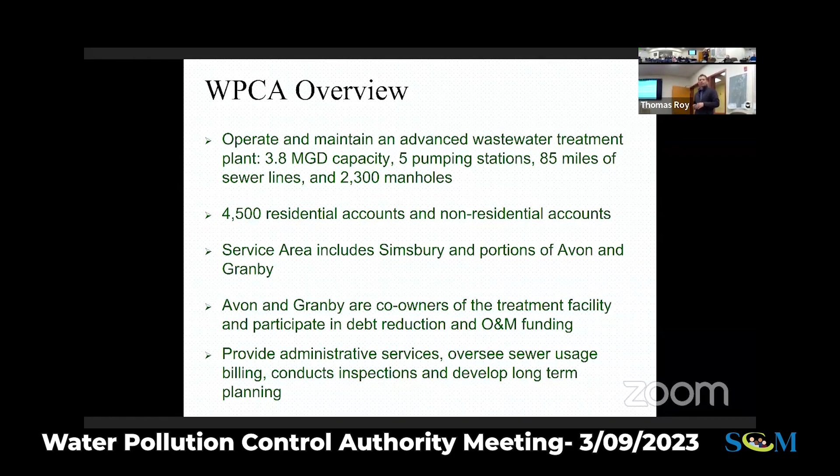Once we start this project, we have to finish this project. You can't be half sewered or half not sewered. So the intent would be to go in, we're going to put down new pipes, we're going to get rid of the old pipes. In some cases, the old pipes might be abandoned in place.

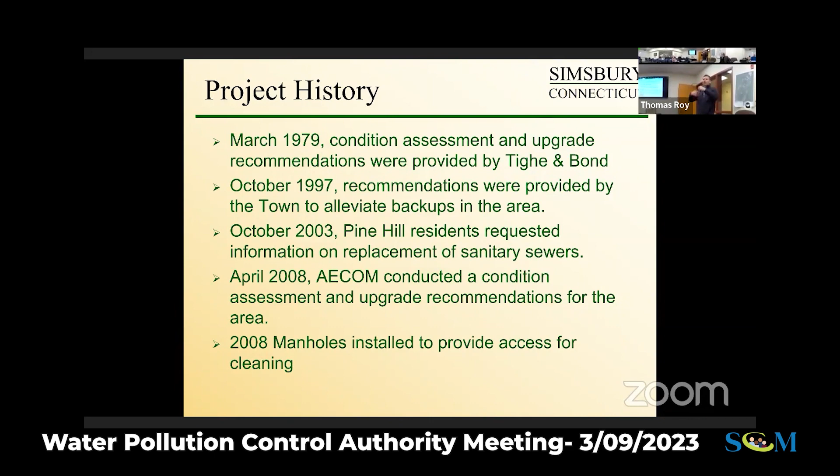We are going to go as near as is reasonably possible to each of your homes in terms of replacing the lateral. If we're in the main line and looking up and we see that you have stone walls and gardens and ornamental plantings, it's going to be very difficult for us to work through or put back in place. We're going to make a judgment as to what is the condition of that lateral. We'll be in a hole looking at the lateral right there, being able to tell, is this a good quality sound pipe? Is it filled with roots? What is the anticipated life expectancy of that pipe? If it's bad, we're going to push forward until we get to a point where it's good quality pipe to make a connection. If it is good, if it was PVC, we're not going to tear up any farther than is reasonably necessary.

All of the roads are going to get paved. We're not doing driveways, we're not doing common areas. It's a little bit of a stretch in terms of what the core mission of the WPCA is, but we're also being very practical and reasonable, trying to find a way to accommodate all of you.

Hey, how are you? Fine, thanks. Excuse me, did I miss anything in our presentation?

No, that was the earlier stuff, just about how we run our stuff, how we run everything. And you know, we work with Granby and Avon as well. Okay, and I think we had just a quick schematic of where we're planning.

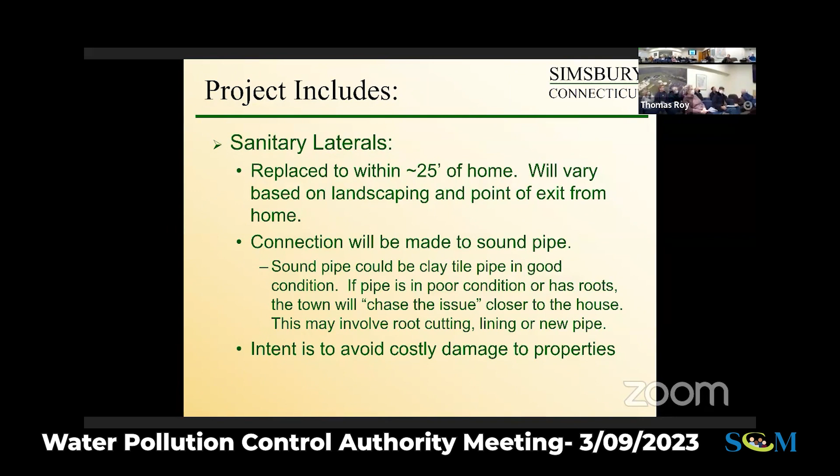What about the curbing that is there in some of the lanes? If there's curbing there, in most cases we would replace it, because most of it needs to be replaced.

I have a question at this point—I'm Jeff Peterson, 11 Stevensbrook Lane. So your plan, there's some areas of the road that you're not going to be digging in, and I'm not talking about common areas, up around the corner. At the end of Pine Hill where it meets Route 10, there's a section where you're not going to be digging, and there's also the curve on Pine Hill Drive where you're not going to be digging. Are you going to overlay that as well?

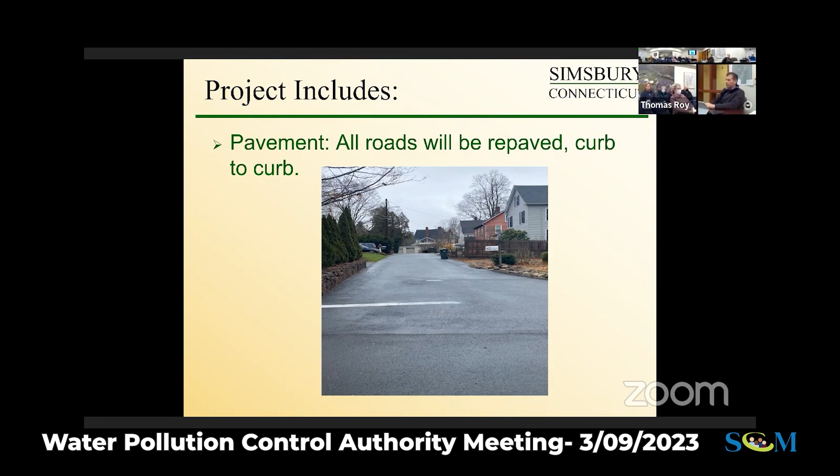We're looking to give you a complete project. Are you going down to foundation—removing all existing pavement and starting over—or going on top of what's left?

It may be a combination depending on when we really get in and look at the condition. A couple things we can do: we can go over the top of an existing roadway—sometimes there's advantages to that. The challenge is you've made the entire roadway 1.5 inches higher, and you have to be careful how that corresponds to drainage, making sure you don't get puddles where you didn't have puddles before. The other method is milling, like you see in the summertime on the highway with that rough surface—they're cutting off 1.5 to 2 inches of existing asphalt, then replacing it, keeping the surface elevation the same. The one we're hoping we don't do is where we have to completely reconstruct everything, because then you're digging up the roadway and it's that much more expensive.

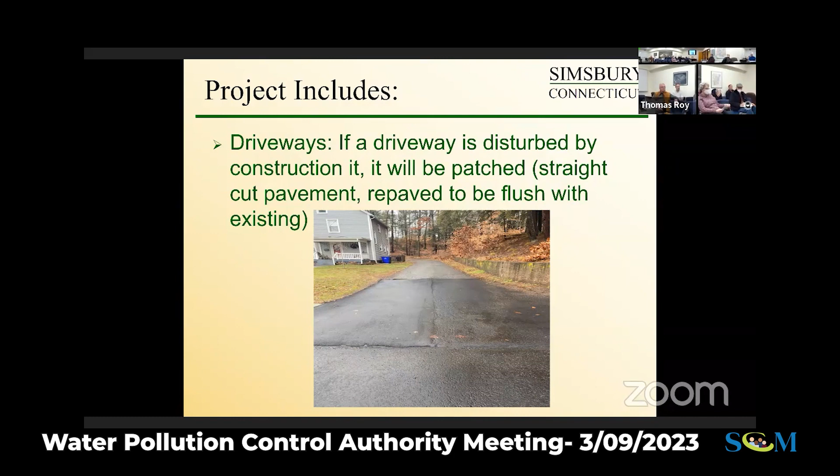Yeah, well, on something like this where the grass is proud, it's higher than the roadway, we would probably have to put curbing in. Similar, and I haven't looked specifically at this neighborhood in at least a month or so, but we would have to make the decision: do you want that sidewalk back, or do you want the roadway to go to that width?

Generally, what my feeling has been in a neighborhood like yours, hopefully people aren't driving that fast. You can walk on the road just as easily, and it's more beneficial to have, I think, a little bit wider road. Yeah, definitely. Nobody walks on the sidewalk.

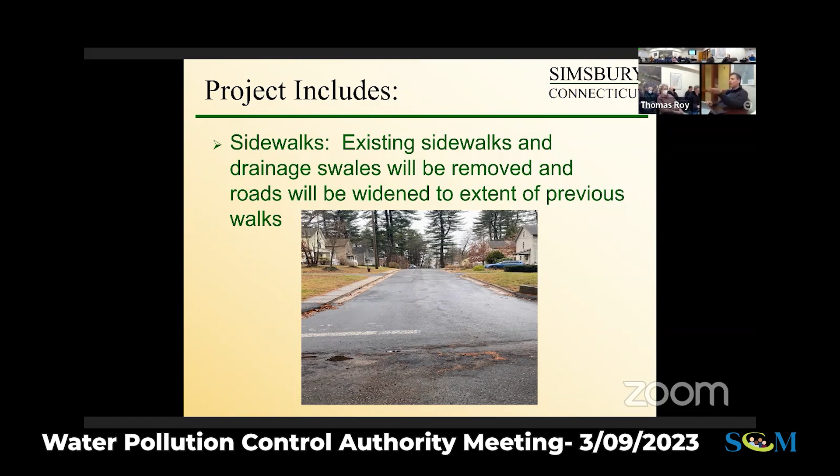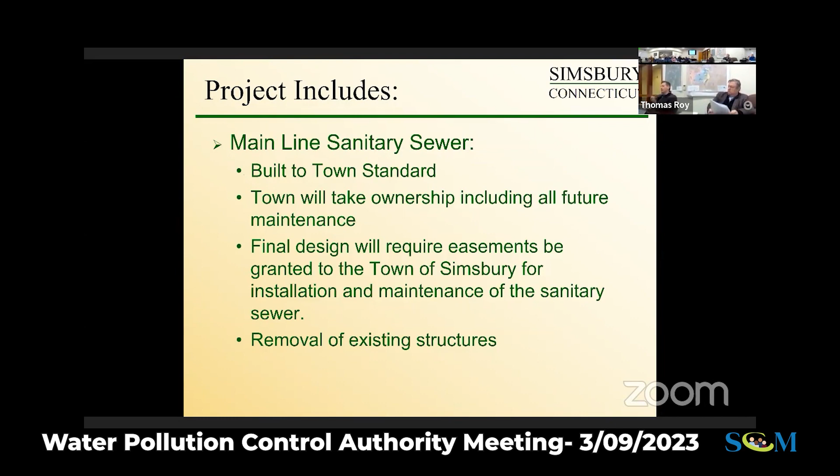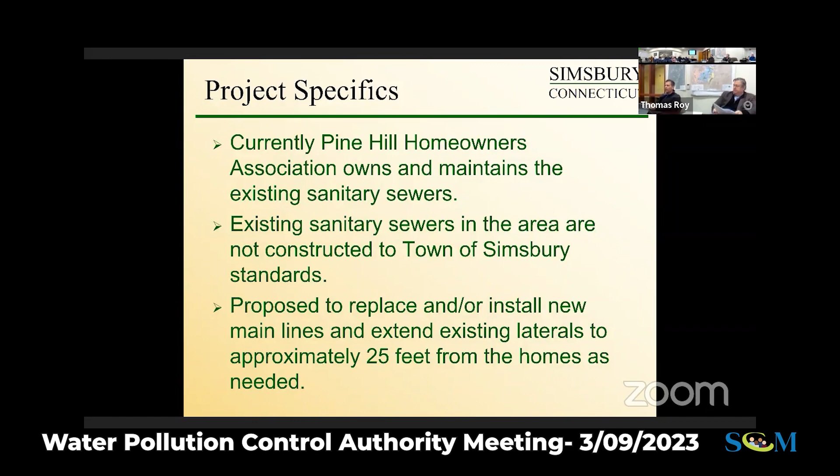Well, we can take a look at that, but a lot of times, the way you're describing it, it's the roadway getting what's called sheet flow, where the water from the roadway is making its way into the grass. It's the other way around, away from it. We can look at it, but Tony's point was that where areas have not traditionally had curb, at least in our preliminary plans, we were not going to add new curbing everywhere. We were going to put curbing back where it needed to be. And there's some advantages environmentally to letting the water drain down onto grass continue to do that.

Quick question on pavement: are we going to be looking at the catch basin tops at least while we're doing paving? To be honest, we're going to try not to get into replacing catch basin tops. This is a little bit like doing work in an old house, we're trying to set limits. So if we do the catch basin top, we're going to do it if we have to, but we're going to try not to, because once we get into the catch basin top, now is that storm drainage good too? We really want to keep this project to sanitary sewers and the roadway, and not get into storm drainage and other things, because it gets very hard to stop once you start. We want to really be careful about managing the cost.

Are you talking about the medallion-shaped catch basin top? Is that what you're talking about? It's steel, it's heavy, it's old. If you're talking about manholes... the storm drainage, where water can run down. Those were replaced not too long ago. Just the grate was replaced, but the perimeter of it, or partial, was not replaced.

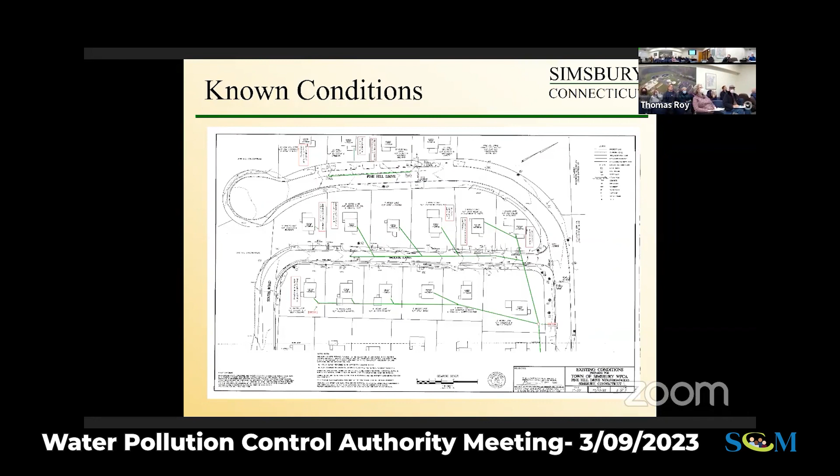There are some items we don't know, like underground utilities whose locations we're not aware of, so we may run into conflicts that require us to adjust the sewer installation. We need to stay clear of water lines and any natural gas lines. We just did a similar project on Woodland Street where there were two water mains, and they kept marking out the wrong one for us.

In our civil engineering 101, which you'll all get degrees in by the end of this: water lines are under pressure, so you can go down and come back up, no problem. Sanitary sewer flows by gravity, so we have to be very careful—once you go down to pass under a utility, the rest of that line has to stay deeper because you can't go back up. It's much trickier to install sanitary sewers than water lines.

The other thing right now is there are two retaining walls. On the first row, there's a nice retaining wall going up. To replace the laterals going in, we're going to have to tear that retaining wall out and put it back. I've already had comments from several homeowners about that. We actually looked at the cost savings of potentially not putting that retaining wall back in, but it would create too much of a slope.

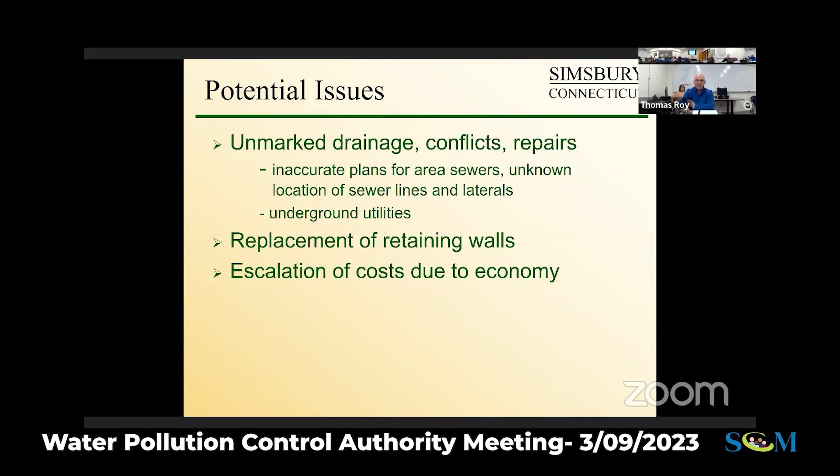As you guys know, the cost is all based on the economy, and we don't know what it's at right now. We have our estimate at $975,000. So what happens—I know you still have to put it out to bid—what happens if you're into the project and all of a sudden there's a big cost surge?

A couple things. First, when we put it out to bid, we're going to get pricing. If the bids come back terrible, we'll pump the brakes and probably bid it again at a different time. If the number came in at 975, we'd go forward with the project. If it came in at 1.3 million, we'd probably take a deep breath and wait to see if we get a better bidding environment in another six months.

We've had projects the WPCA has done in the past—we had one up on Bushy Hill. We bid it in the fall and got very bad pricing. We waited, bid it again in the spring, and the pricing was substantially less. A lot of times it has to do with not just contractor availability, but how many other projects are out to bid, and costs. Right now, one thing hurting us is diesel costs, since everything the contractor brings runs on diesel. But we're also seeing improvement in supply chain issues and other things that were driving up costs the last two years.

So how many contractors do you anticipate? We would normally get between 3 and 8 on something like this.

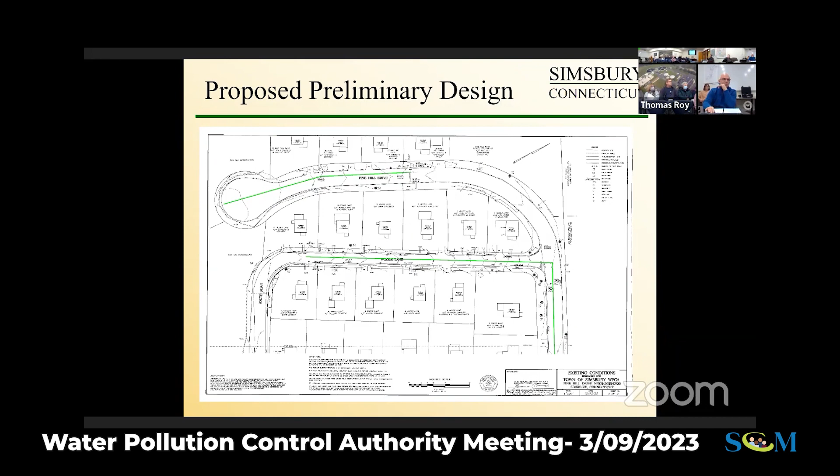I'm sure Tom told you guys last time, this is a revolving fund. The assessments, when you pay your assessment back, it just refunds this project so we can go do other projects in the future. So it's just a continuously moving fund, and we try to maintain it at a certain level. We depleted it over the last few years with a couple of projects that we've done, but we try to maintain it at a certain level so if anyone comes in and asks for us to do projects, we have enough money so we don't have to say no.

And good or bad, it's the way it is, nothing is assessed until the project is done, and then it would be the next November. So if this project is done, say in October, the first bill wouldn't be till next November, the November after we're done. So you'll have free use of the sewers for a year.

Put that on a t-shirt.

Not free use. You still have to pay your sewer use fee, but you wouldn't have to pay the assessment. So deferrals, like buying furniture.

Yeah, that's it. So talking about, you mentioned October, what do you anticipate the start date, the month, and completion? After this meeting, if the WPCA board approves the project, we'll get right into design, and the design will probably take 2.5 to 3 months.

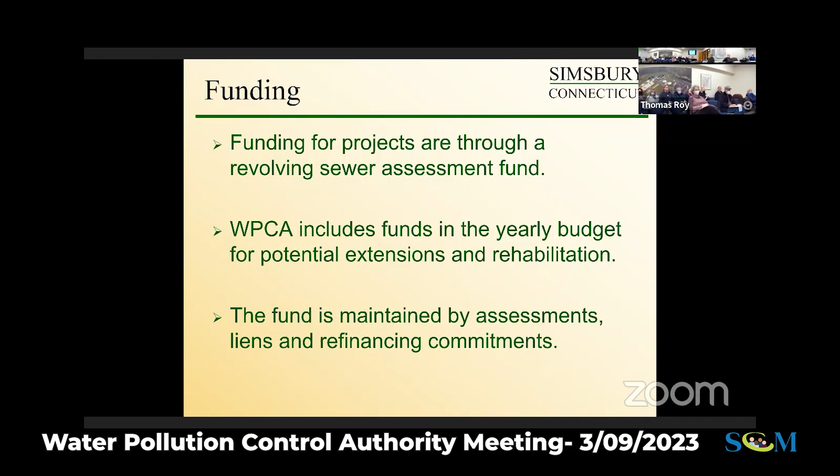Got it, all right. As we discussed, the estimate at this point in time is $975,000 for the whole project, and basically it comes down to $135 a month.

And right now the interest rate is all projected on whatever the town bond rate is. As Tom said, that hasn't been updated yet for this year, the last rate was 1.8%. Talking to the finance director in the town, other towns are getting rates at 4% right now for bond rate.

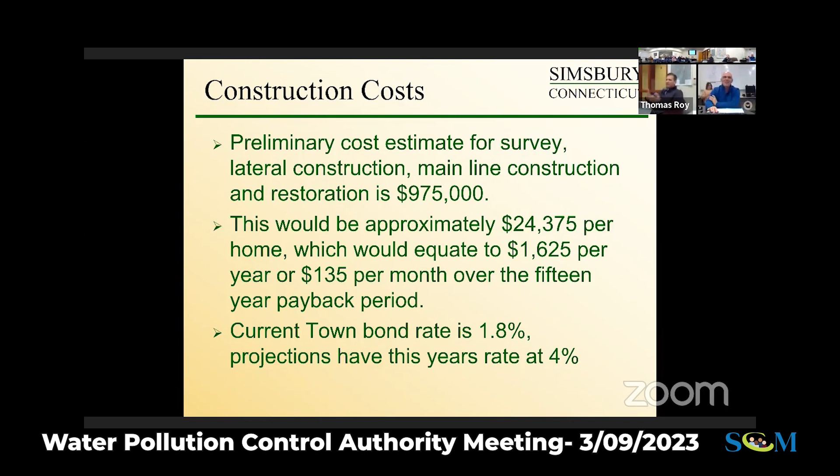So that would be the interest rate you'd be charged if you choose to finance it through us, which you don't have to do. You guys can finance it however you want, but if you want to finance it through us, that's fine. Cash, whatever's easiest—sure, check.

As Tom said, it's going to disrupt things—we're going to do one road at a time, we're not going to jump from road to road. But we'll always make sure that you always have access to your house. We'll notify you guys when we're tying in your line to your house.

That helps our contractors out too, to say, hey, please don't use your bathroom for the next hour. It's not going to be that you're without sanitary sewer for 3 days. It'll be an hour or two hours while they're doing a connection.

Would you pave each road as you complete the work on that road, or would you wait till the end and then pave? They would definitely do some sort of temporary pavement probably, but again it would be up to the contract, and it's weather dependent. It's more cost effective for them to go in and pave the whole thing at one time instead of doing one at a time.

Typically, we would leave the roads as stone, or at least the trench would be stone during the week, and you would potentially just button it up on Fridays with a temporary pavement. With the low traffic in this neighborhood, it may be a place we could save a little money, depending on the contractor and the weather patterns. If we could leave the trenches with compacted stone for a longer period of time, that may help manage some of the costs.

In determining which lane gets done first, are you going to think about the magnitude of the project before each lane, or haven't you thought about that?

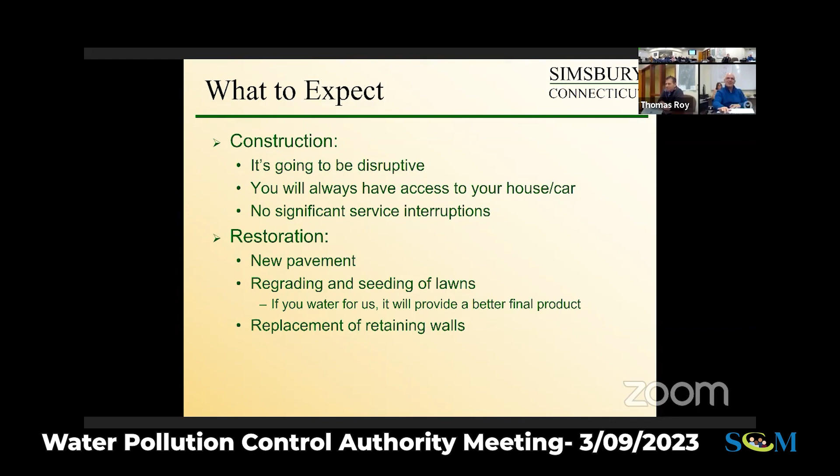When we do reseed the lawns, we do ask that you water the grass so it grows, just so we don't have to come back five times to plant more grass. Do we just seed it once and if it doesn't grow, it's up to them? Yeah, that may have been a challenge on one of the projects. We've had a challenge with that a couple of times recently.

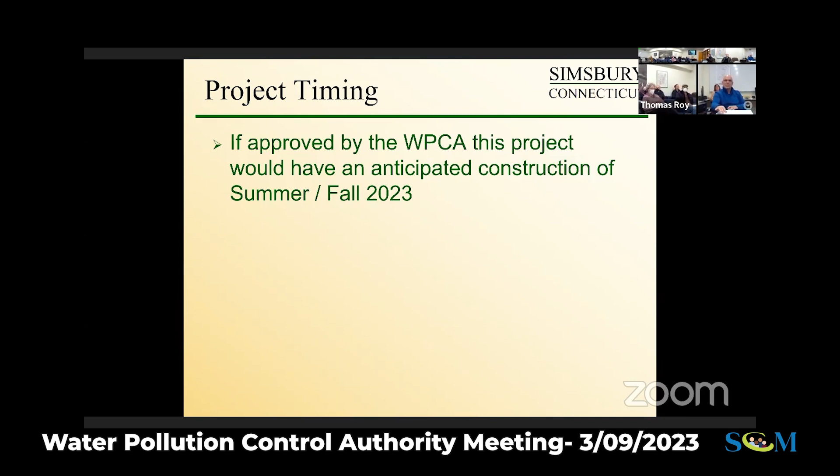As we said, the hope is if this project is approved by the Water Pollution Control Authority, we'll start construction late summer, early fall this year, and we'll finish where we started off. If there's any other questions.

I have some questions our property manager wanted to make sure I ask. One is that you will thoroughly outline all the steps going forward for everyone, to make that clear, so everyone will know step by step everything that's going to be done and when it's going to be done.

What we did when we were doing the neighborhood that was most similar is we were sending out at least one email a day, sometimes two, saying this is what's going on today, this is what's going on tomorrow, you can park here, not there. It's a delicate dance, and we try not to inundate everybody with emails. So if we're working on one street, we send emails to people on that street, so people on South Road aren't affected by updates about Pine Hill, because it doesn't matter to them, and vice versa. So all homeowners will get that information.

Start date and end date, we just talked about. For any questions that occur, the Pine Hill board members are not to be approached or spoken to. Any questions go to you guys. Go to me. So that was the question, was it Tom or Tony? It would go to me. It goes to you, Tony.

Do you have a specific number that's just yours, just a phone number? No, it's just a direct line here. I'll give you his home number later. Sounds good.

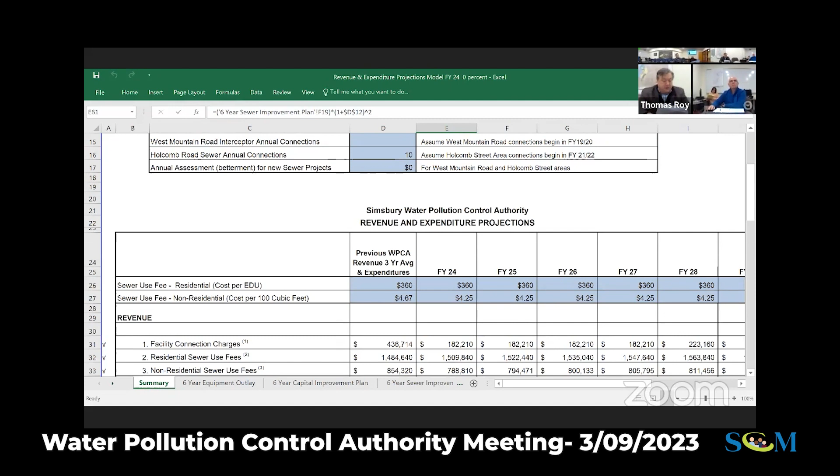I wasn't a math major, but I did study finance, so I know the numbers, and I knew that was off. So looking at it, if we don't increase this, we're going to be putting ourselves a little skinny on where we want to be with our reserve fund. Given that we haven't raised the fees for several years, and we're only talking about going up 4% since we last moved them, I think that's a very reasonable increase. I like to be fiscally prudent, and I don't find anything objectionable about a 4% increase. So I'm in favor of it, but I want to read the room and see what you all are thinking.

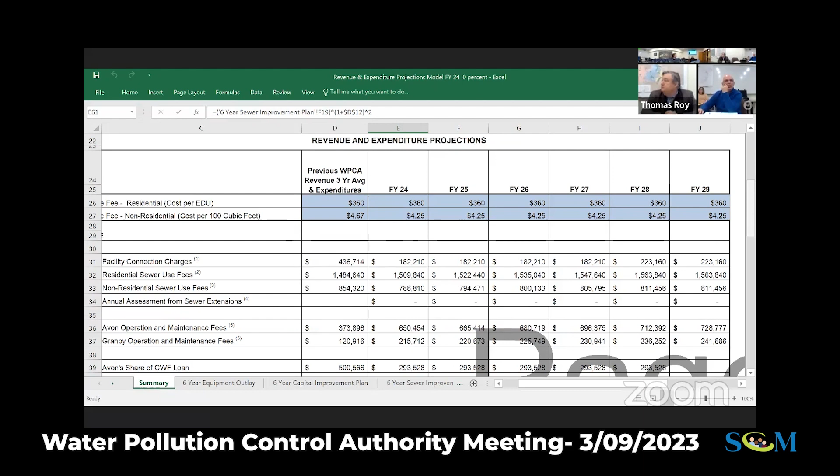Just so you can see on the screen, I've shared our financial model. This is without any increase for the next 5 years, and the important numbers are down here at the bottom. As you can see, based on all the capital projects we're undertaking, our reserve fund would be down to just over $2 million in 4 more years. And that's without accounting for the fact our permit is getting renewed next February, or runs out next February.

Right, Jay? Totally agree. With PFAS, biosolids, and all the things getting a little weird in the industry, it's just a prudent time. I agree with Paul, we should have a modest increase and stay ahead of the trends we're seeing.

Okay, so anybody, what else? What will be the situation, the numbers, if we increase it by 4%? Yep, I'm going to bring that up right now.

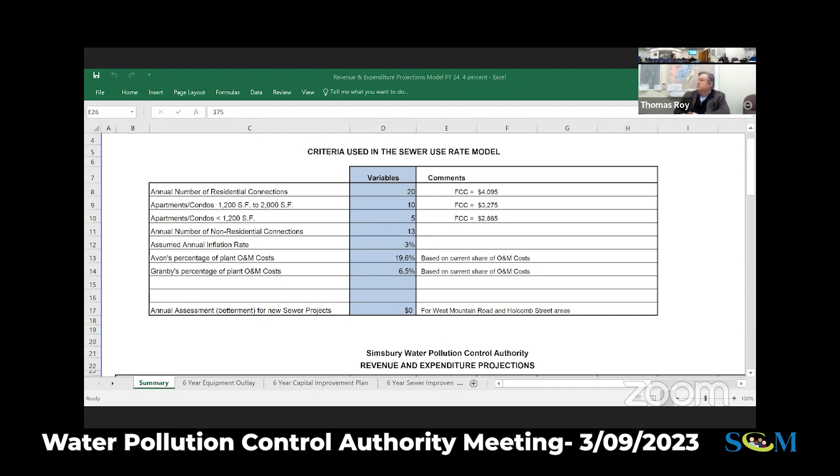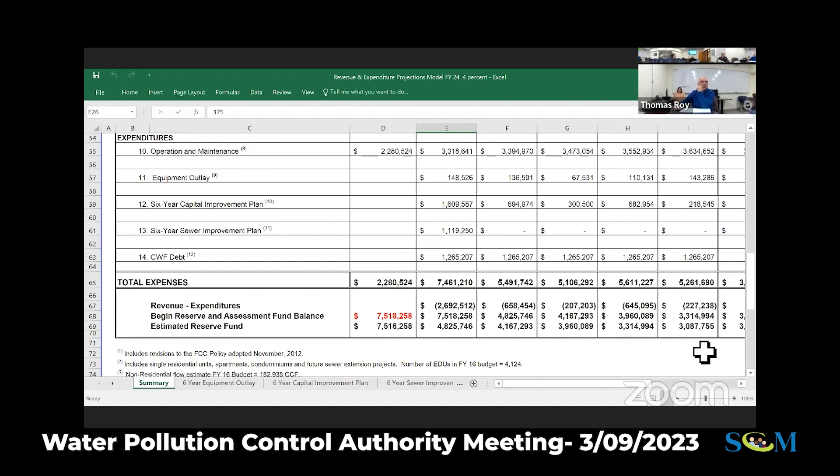With a 4% increase, same situation, we'll be at $3 million in 4 or 5 years. So we're $1 million more with just that 4% increase. What we talked about is doing 4% this year, and in 2 years' time, maybe another small increase depending on what some of our capital costs are. Yeah, that makes sense to me.

What's the smallest reserve we've ever carried, as far back as anyone can remember? Do we know that? Since I've been here, the lowest it was at $4 million. Four has been the lowest. This $7 million we're starting with right now is actually the reserve and the assessment fund combined. So both of them would be down to $2 million in 4 years.

Do you know what the biggest dip we've ever had to take into the reserve fund has been in any given year? This year it was $2.5 million, because that includes the primary clarifier rehab and the project for Pine Hill. So in other words, if we don't change anything and have another repeat year, we'll have zero left in the reserves. Correct.

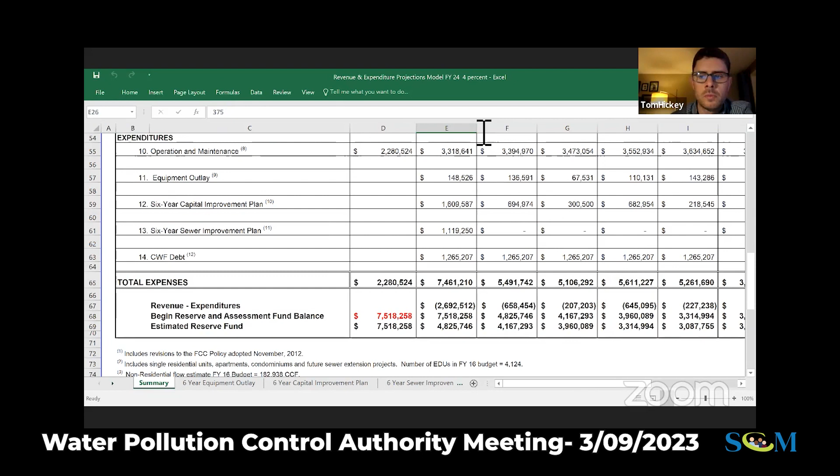Anybody else wish to be heard? Does anyone think we should raise it more than 4%? Well, maybe we'd go 4% and increase it again, as Tom said, maybe in a couple of years. Another small increase.

Full disclosure, Tony and I talked about whether it should be 375 or 380. 375 came out to be an even 4%. Seems to be a very reasonable increase with the financial pressures everybody's under. And certainly you have the ability to raise it even next year if we needed to.

Right, okay. Seems fair. So is everyone in agreement? Do we need a public hearing on this? Yes, we do, as it says in the agenda. So what I would be looking for, before we go with that, I've got to share another screen. Oh, now you do? We need to hear more about this? Well, we need to hear more about if you guys want to change any other fees. Okay.

This one here. Because the analysis was only on these two fees, right? Well, those were the two big ones. So these are the existing fees as we have them right now, and the years they were changed. Obviously the two we're looking at changing are the residential and non-residential sewer use fees.

I think everything else is still pretty much in line. For septic dumping, I did an analysis of everyone in the area and we're within $5 of pretty much everybody else for septic fees. The only one I'm going to run past you guys, and it's not a big ticket item, but I think it may be a prudent thing to do...

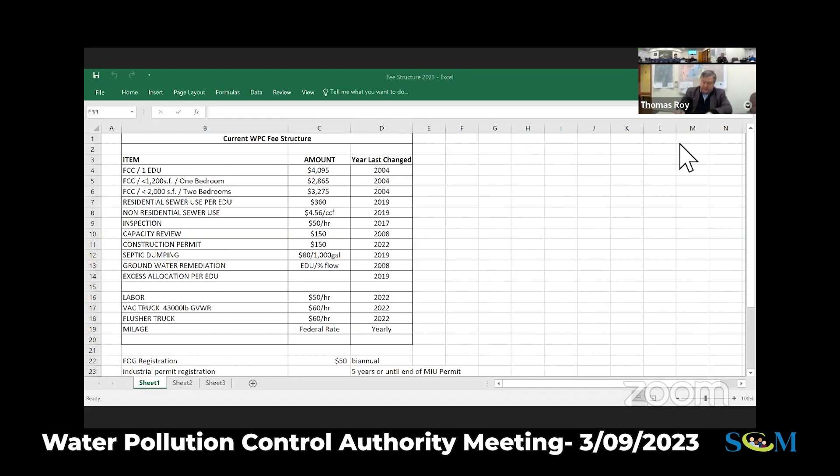That takes us to the last item, which is adjournment. Does anyone wish to debate whether we should adjourn? Motion to adjourn. Anyone second? Second. All in favor? Aye. Motion carries unanimously.

Hope you all are well. Springtime's just around the corner. Springing forward this weekend. Absolutely. Alright, well good to see you all.